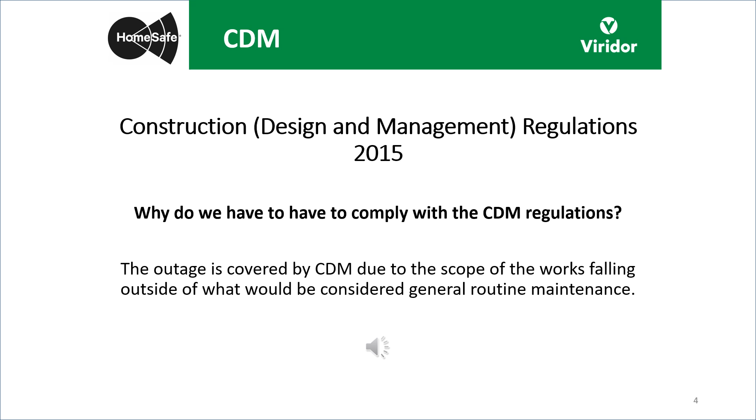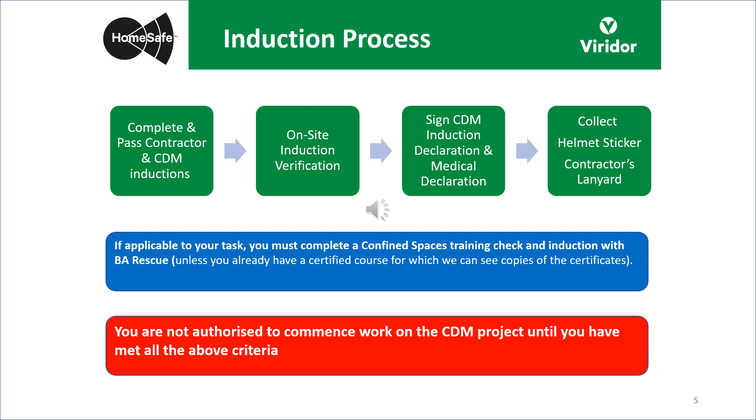BA Rescue will be providing confined space management and security services on site. Please think of them as an extension of the Viridor team, and they'll be able to answer any questions you may have around confined spaces or safety in general.

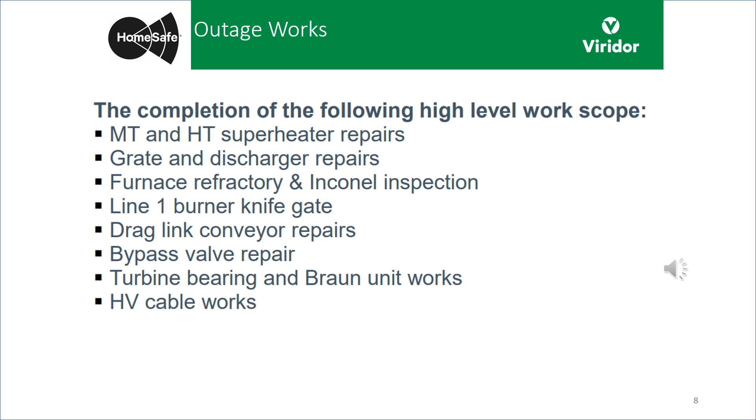Due to the reactive nature of this year's outage, the welfare and site layout will be split into two phases, which are detailed in this slide pack. This stage details the plans for the period between the 2nd of April and the 6th of April.

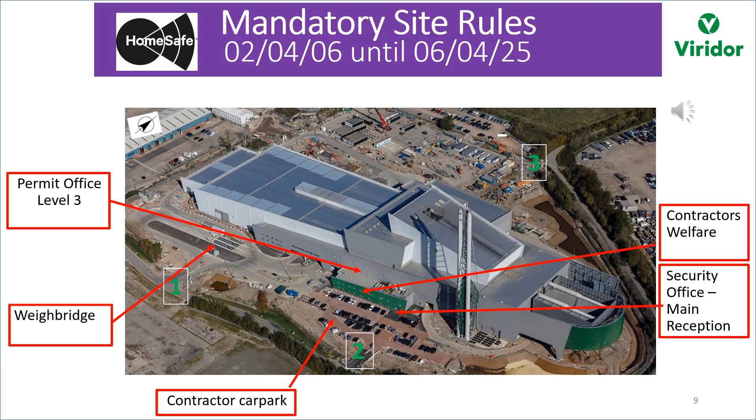The welfare will be in the Polymers building, which will be directed via signage from the main entrance to the ERF. The permit office is in the usual place on level 3 of the admin building.

During the initial stages between the 2nd and the 6th of April, you must always enter and leave site through the ERF reception. This can be found at the entrance to the site and is displayed on the screen. You must sign in and out when leaving site at any time.

From the 2nd until the 6th of April, please ensure that you always leave site via the ERF reception. This can be found on the screen and is at the entrance to site via Gate 2. You must sign in and out when leaving the site at any time.

From the period of the 2nd until the 6th of April, you must always enter and leave site through the ERF main reception, ensuring that you sign in and out using the book. This is to ensure that we comply with fire regulations, and should there be a fire, we know who is on site at all times.

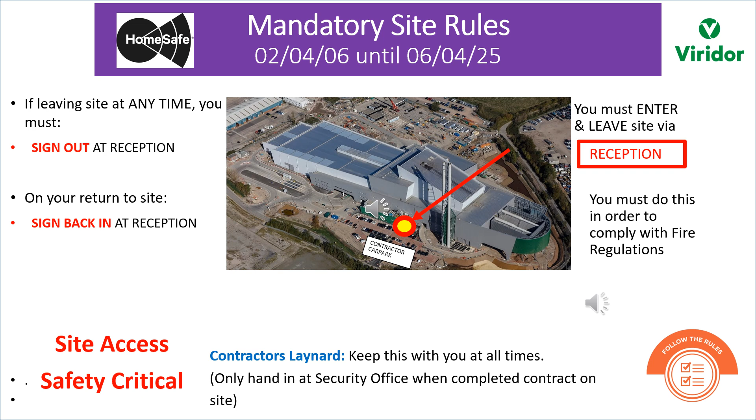The ERF reception can be found at the entrance to site as displayed on the screen.

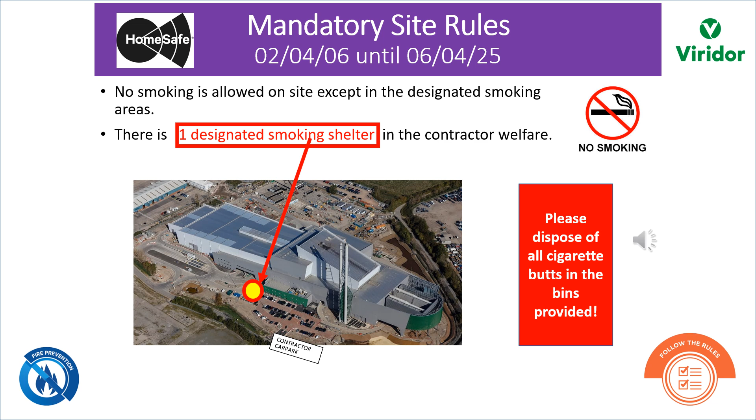There is strictly no smoking or vaping anywhere on site apart from the designated smoking area. There is a designated smoking shelter shown on the screen, which is at the front of the ERF. Please ensure you dispose of all cigarette butts in the bins provided.

The muster point is located at the Contractors Village car park. From the 2nd of April until the 6th of April, all contractors must make their way there as quickly as possible and make sure you've been accounted for by one of the Viridor fire marshals.

All contractors must make their way back to the muster point as quickly as possible, and make sure you have been accounted for by a member of the Avonmouth ERF fire marshals. You will not be allowed back into your work area until instructed to do so by a member of Avonmouth ERF staff. Do not leave the site unless instructed to do so by Avonmouth ERF staff. There are also a number of automated external defibrillators on site, including the weighbridge, the level 4 control room, and the ground floor of the boiler hall.

As previously mentioned, contractor welfare will be split into two phases. From the 2nd until the 6th of April, car parking is located at Gate 2. Remember, you must reverse park. Please car share wherever possible.

The offices and welfare facilities will be clearly signposted from the Avonmouth ERF main reception. Female toilet facilities will also be available. You as a contractor are fully responsible for the security of your own belongings and equipment whilst you are on site.

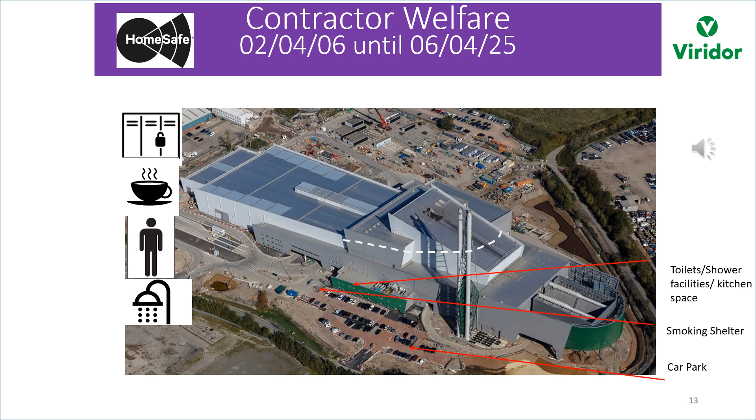The weighbridge is located at Gate 1. The entrance to the Viridor staff admin car park is located at Gate 2. Entrance to the contractor car park and welfare facilities from this stage onwards is located off Abbott's Lane at Gate 3. There will be road signage to direct you to the Outage Village on the north of the site.

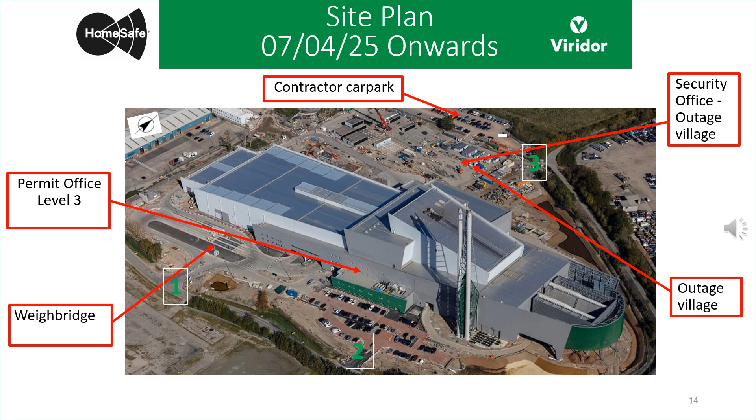The security office is at the entrance to the Outage Village. The main admin building is on the south side of the site. The permit office is located at level 3 of the admin building.

From the 7th of April onwards, the muster point is located in the Contractors Village car park. All contractors must make their way there as quickly as possible and make sure you've been counted for by the Viridor Fire Staff Marshals. You'll only be allowed back into your work area when the all clear has been given by a member of the Avonmouth ERF staff.

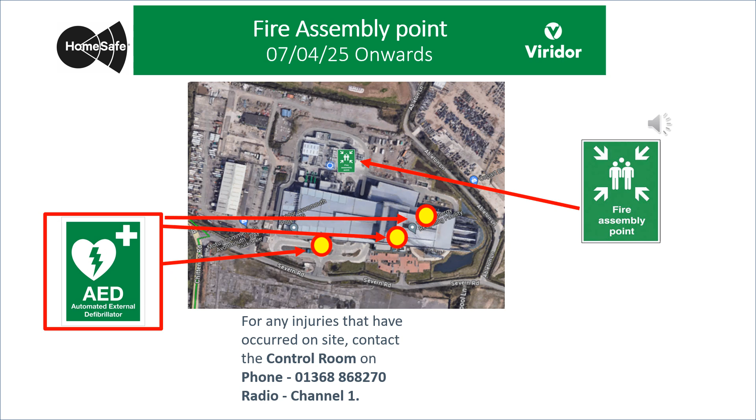Do not leave the site unless instructed to do so by Avonmouth ERF staff. There are also a number of automated external defibrillators on site, which are located at the weighbridge, the control room on level 4, and the ground floor of the boiler hall.

Contractor welfare from the 7th of April onwards: car parking will be located in Gate 3 off Ableton Lane. Remember, you must reverse park, and please car share wherever possible.

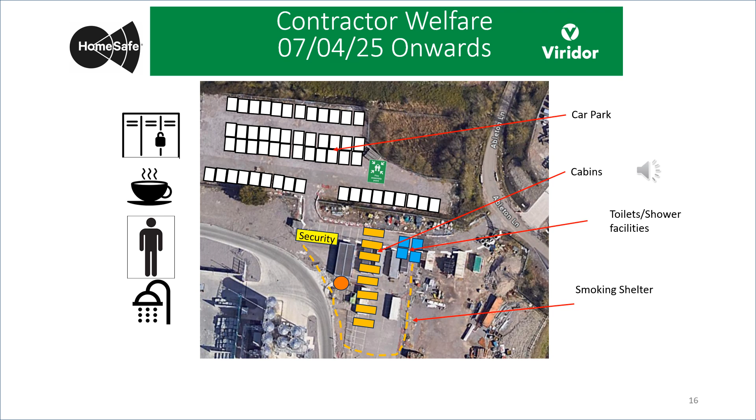Offices and welfare facilities will be clearly signposted. A female toilet facility will be available in the Outage Village. From this phase onwards, under no circumstances should contractors be using the Viridor staff facilities. You as a contractor are fully responsible for the security of your own belongings and equipment whilst you're on site.

From the 7th of April onwards, you must always enter and leave site through the security office and sign in and out via the sign-in book. This is to ensure that we are complying with fire regulations and aware of who is on site should there be a fire.

The site security office can be seen on the screen.

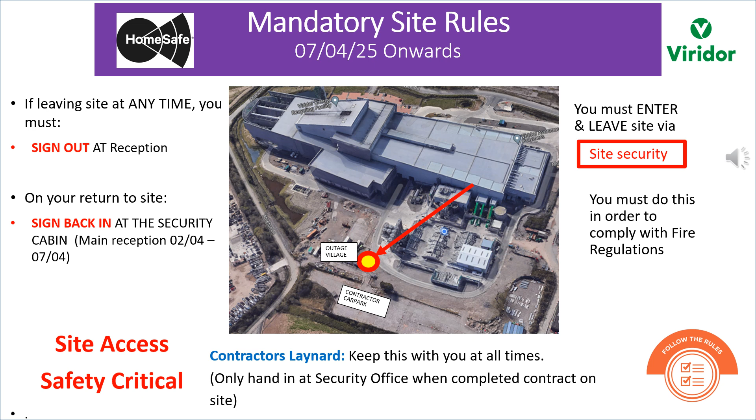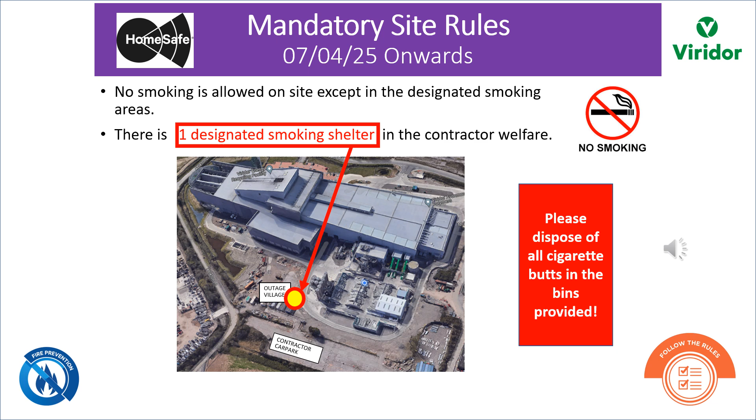No smoking is allowed on site except in the designated smoking areas. This includes vaping. From the 7th of April onwards, there will be a designated smoking shelter in the contractor's welfare. Please ensure you dispose of all cigarette butts in the bins provided.

It is strictly forbidden to steal, cause willful damage, consume alcoholic drinks or drugs, or bring illegal substances onto site, or engage in any other activities which could jeopardize the safety of any person. Such behaviour will not be tolerated. Viridor reserves the right to conduct random searches of both people and vehicles entering and exiting site. Entry may be refused, or you may be asked to leave site if items found during a search cause concerns for health, safety and welfare of all on site.

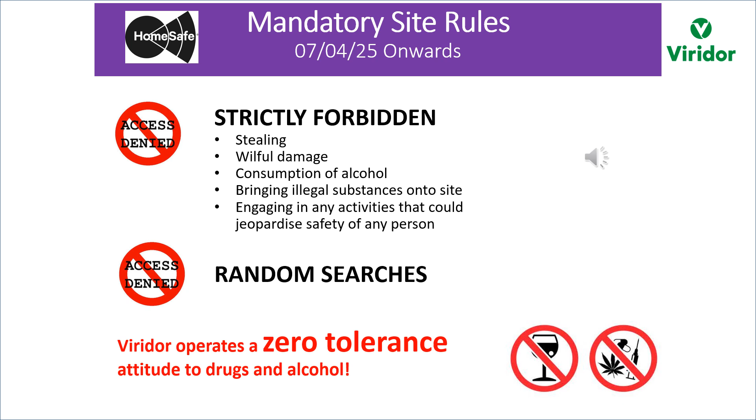We have a number of site rules. If you do not comply with the site rules, you may be issued with a yellow or red card. A red card means you have to leave the site immediately. Listed on the screen are just a few examples of the infringements that could lead to a card being issued.

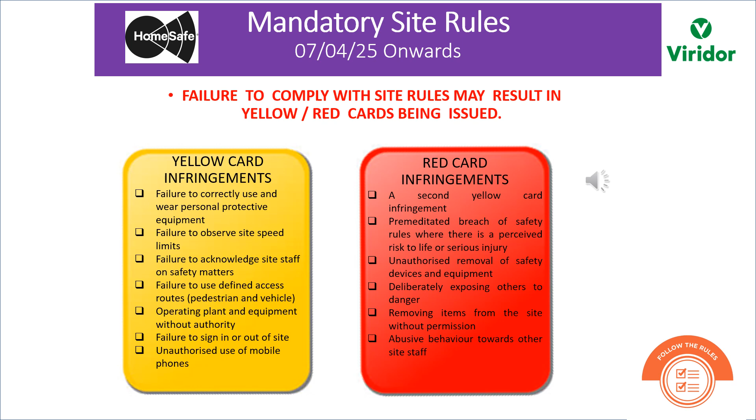The Operations Control Room is responsible for coordinating all emergency responses for fire, first aid or spillages, and this would be done through the duty shift team leader.

If you discover a fire, raise the alarm immediately and inform a member of the Avonmouth ERF staff. Everyone on site must go to the muster point as quickly as possible if the evacuation alarm sounds. Not responding or responding slowly may lead to a yellow card being issued.

Our fire alarms are tested weekly at 10 o'clock every Thursday. When the alarm goes off at that time, please do not do anything. If the alarm continues to go off, or you hear the alarm at any other point during the week, you must proceed to the muster point immediately.

The tap water in the welfare facilities is drinkable and there will be bottled water available on plant. Please ensure that all of your waste is placed in the bins provided and ensure that all electrical equipment brought to site is PAT tested.

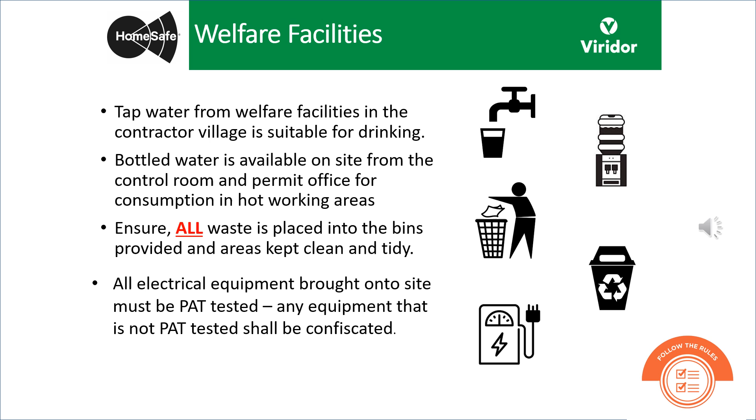All permits must be surrendered each time you leave site and at the end of every day, at the permit office only. No hot works can be undertaken without a permit. Specific permits are required due to the fire alarm and sprinkler system on site. Hot work risk assessments will be carried out by a member of the Avonmouth ERF staff. Working areas must be tidied up in line with the POWRA safety requirements. The supervisor of each working group, or a single person if working alone, must have completed competent person and nominated supervisor training. Contact the permit office for more information.

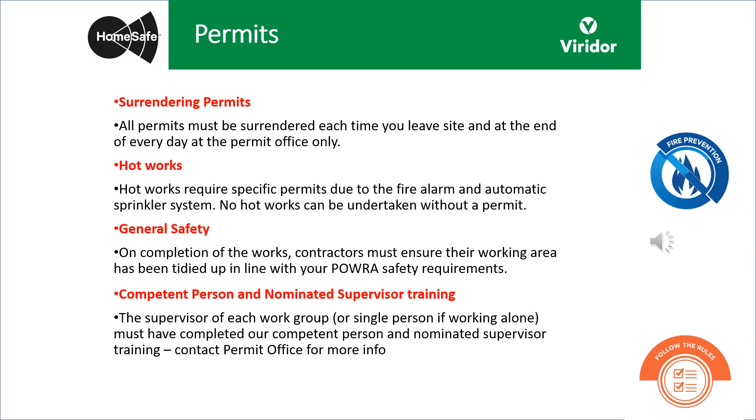The most common confined spaces on site are as follows. To enter or work in a confined space, you must have the correct training, certification, equipment, and permit before entering. You must log in at the entrance and hand over your tally tag. You may exit the confined space at a different level from which you entered it, so you must return to your entry point to log out and pick your tally tag back up. A klaxon or air horn will be used as the evacuation signal for confined spaces.

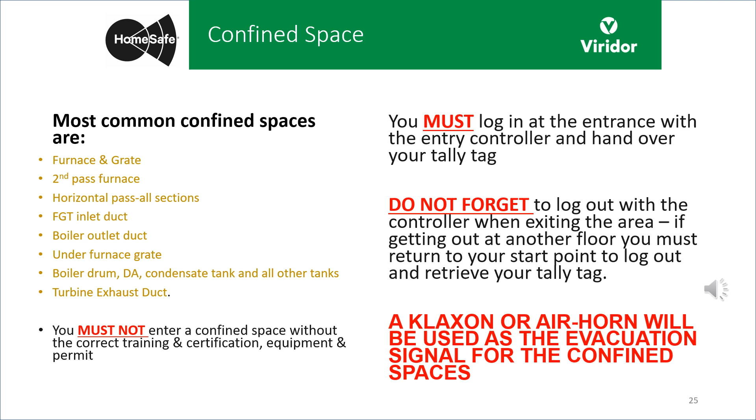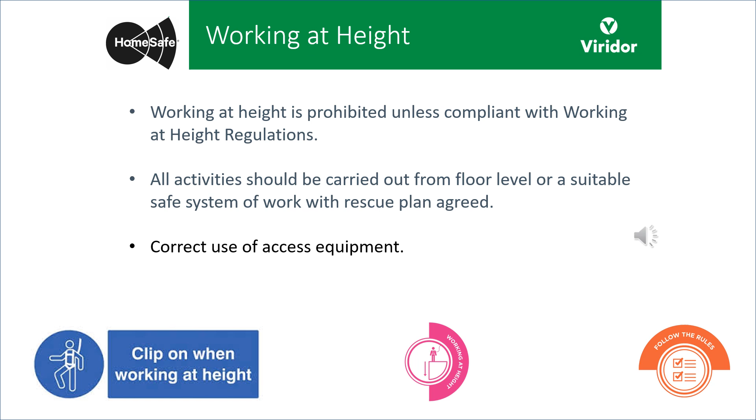Working at height will be part of the risk assessment and method statement produced before the commencement of any work. This can vary from the use of a MEWP to the use of rope access. Please ensure that what is written in the RAMs provided is followed exactly, and to clip on where appropriate and use the access equipment correctly.

If using ladders, then they must be inspected by a competent person and have correct inspection tags. Always visually inspect ladders before use and ensure that they are stored correctly. It is Viridor's policy that ladders are used for access only and should not be used for work that could go on for a considerable amount of time. Please consult your supervisor if you are unsure of any of this.

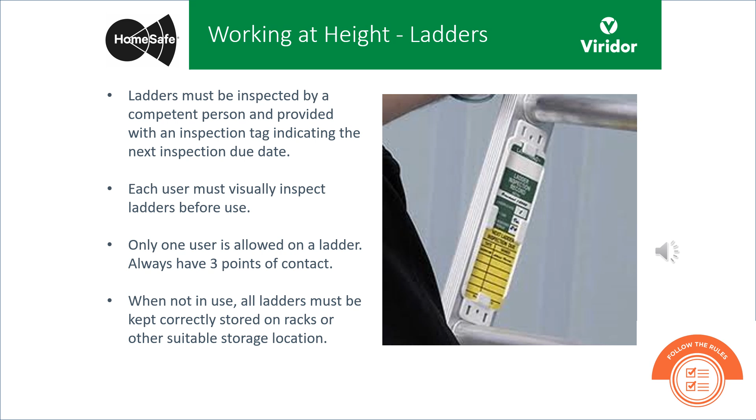All scaffolding must be erected, maintained and inspected in strict accordance with current legislation and only by competent, authorised personnel. The scaffolding team for the Avonmouth ERF outage will be Rainhams, so please consult them for any questions on scaffolding. Before using it, you must carry out your own individual visual inspection, and if you have any concerns or find any defects, report them immediately to a member of the Viridor ERF staff and Rainhams, and do not use the scaffold until it's been properly inspected and repaired.

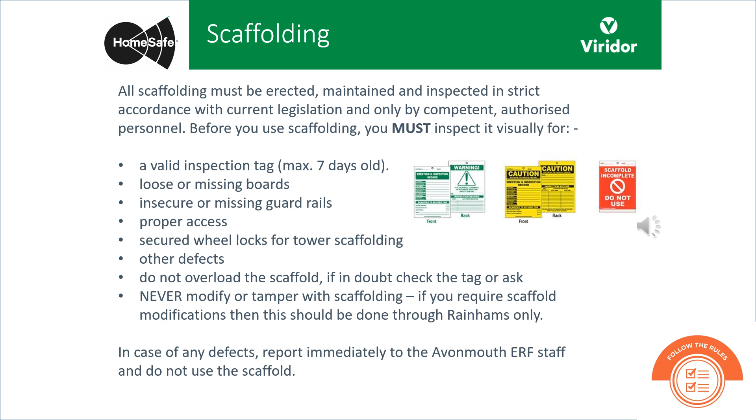If you're undertaking any welding activities on site, you must comply with the new HSE regulations and put control measures in place which include RPE, respiratory protective equipment, and LEV, local exhaust ventilation. Give consideration to others working in the area and ensure that a COSHH assessment is in place. As a minimum, an FFP3 must be worn by everybody entering the boilers. If you're unsure on this, please contact your supervisor or a member of the Avonmouth ERF team.

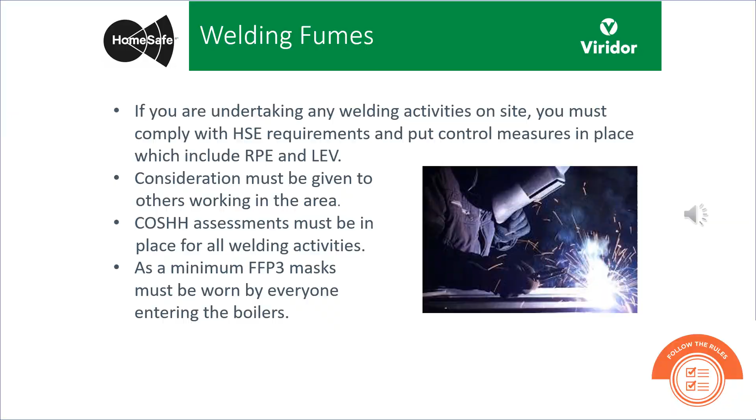Chromium-6 has been found at a number of the Viridor outages. It is a compound that has a significant effect on health. The compound can enter the body through inhalation of dust, skin contact with solids, or swallowing dust through food handling. Such exposure over a prolonged period can cause serious health effects such as damage to the nose, inflammation to the lungs, allergic reactions on the skin if contacted, or cancer on the lungs. More information can be found on the HSE website.

Some areas where the deposits have previously been observed are the furnace, the boiler drum, external surfaces of high temperature pipework and associated components, and the steam turbine inlet valves. Any personnel entering the boiler prior to grit blasting must assume that chromium-6 may be present and wear the minimum of respiratory protective equipment with an FFP3 filter to EN 140 or equivalent, with a protection factor of 20.

Disposable nitrile or chemical resistant gloves, disposable protective coveralls with level 5 protection to EN ISO 13982. These coveralls must be removed on exiting the boiler to minimise the spread of dust, so please ensure there are spare coveralls available prior to entry. Goggles must also be worn if you are not wearing a full face mask.

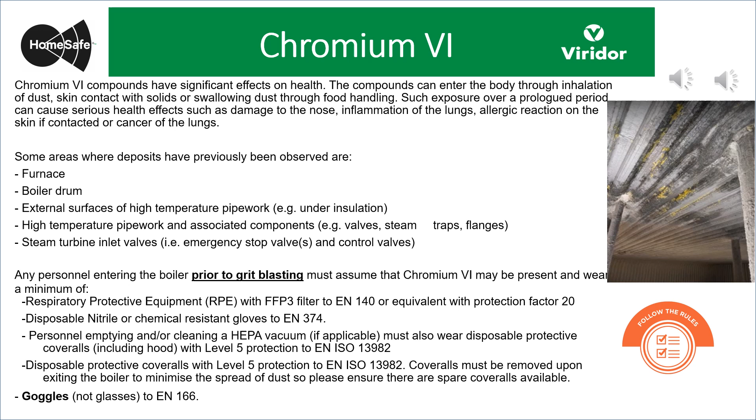Report all spillages immediately to a member of the Avonmouth ERF personnel and contain the spillage according to procedures. Spillage kits are located around the facility and are clearly signposted.

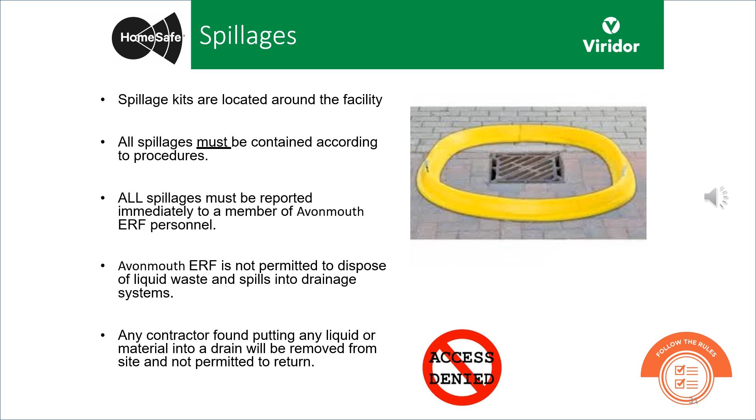Please be aware that there are areas and parts of the site that will remain fully operational during the outage. This includes the exit and entrance to the tipping hall and the stores delivery area. The Viridor polymers plant will be fully operational throughout the duration of this outage.

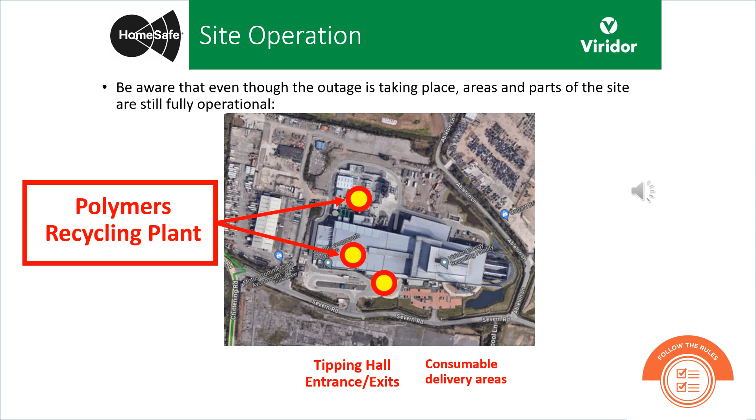So remember, stay in your designated area. You must ensure that you have correctly identified the plant or the equipment before commencing work. Don't start work if you have any concerns at all about the equipment or the isolations, and remember, no work can be carried out without a permit.

Good housekeeping helps prevent accidents. Remember to keep your point of work clean and tidy, ensuring walkways are kept clear and all litter is disposed of in the bins provided. Don't rely on others. Good housekeeping is everybody's responsibility.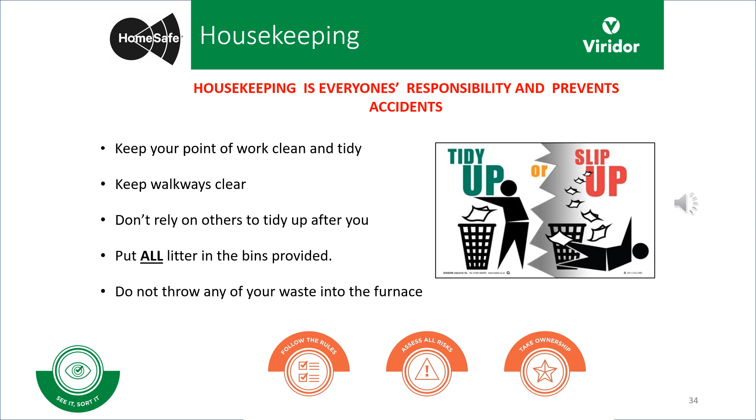Good, clear communication is vital and will help support a successful outage. There will be a daily team meeting and progress meetings at 9 o'clock in the morning in the ground floor admin block meeting room. These will be attended by the site management team, the SAP, the STL, and a supervisor from each of the contractors.

Please ensure that you feed back any news and updates to your supervisor prior to these meetings. A progress meeting will be held in the same location at 4 p.m. every day. If standards fall below the expected standards, then a site stop may be used.

Be aware that there will be a higher volume of people on site than normal, and that many of them will be unfamiliar with the site. Think about the tasks that you're doing and how it might impact on others. Look out for one another, even if they're not part of your team. We all want a successful outage and a safe outage.

Channel 3 is used for the Viridor and engineering maintenance team. All contractors will be on channels 6, 7 and 8. Please be respectful and limit use to essential communication only. All work parties must have at least one radio. All radios must be signed in and out via the BA rescue team.

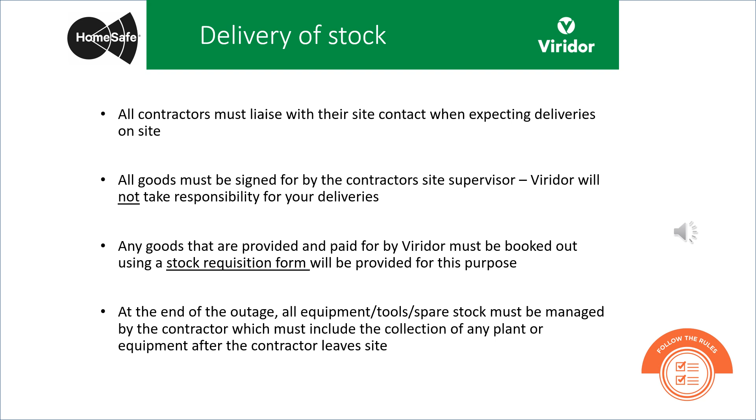As a waste management site, we have a duty of care to inform you of a disease called leptospirosis, or Weil's disease, that is transmitted to humans through contact with infected rat urine. This is a serious and sometimes fatal infection that can start with flu-like symptoms but can lead to serious complications and possibly death. You can reduce the risk of transmission by wearing protective clothing and washing your hands after working on site and always before eating, drinking or smoking.

There are various bait boxes on site and we have a pest control service agreement in place. If you have any questions, please speak to a member of Viridor staff.

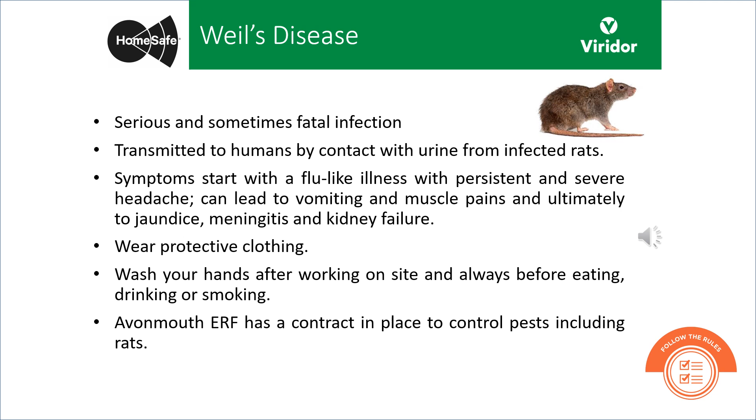CCTV operates across the whole site and is used for safety and security purposes. Please be aware that you will be on camera whilst working, and this can be used in the event of accidents, near misses, and for general site compliance.

Finally, I'd like to thank you very much for your time today, and please remember that if you're unsure about anything, you must ask. There's no such thing as a silly question, and never assume. Let's ensure that everybody gets home safe.